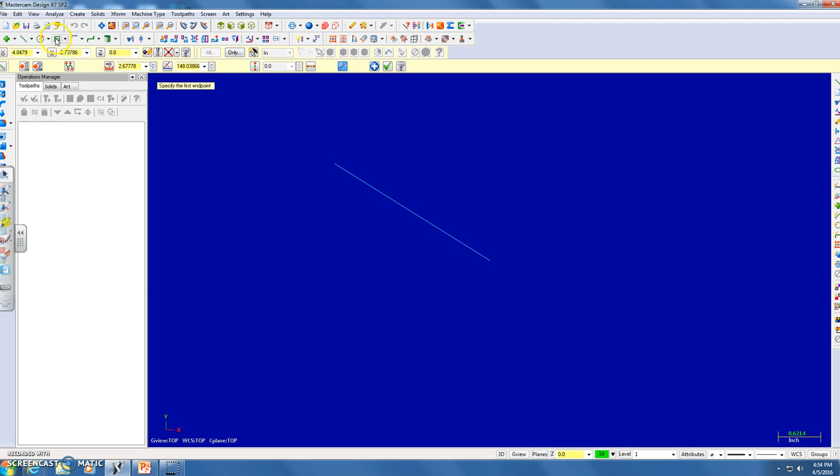So I can create a line. Remember we talked about origin programming, so I want to start by going up to my X, my Y, and clicking 0, 0. Then I always click up off to the left. That way right now I know where my 0, 0 is, I know where my origin is, so I can go ahead and make myself a rectangle at the origin.

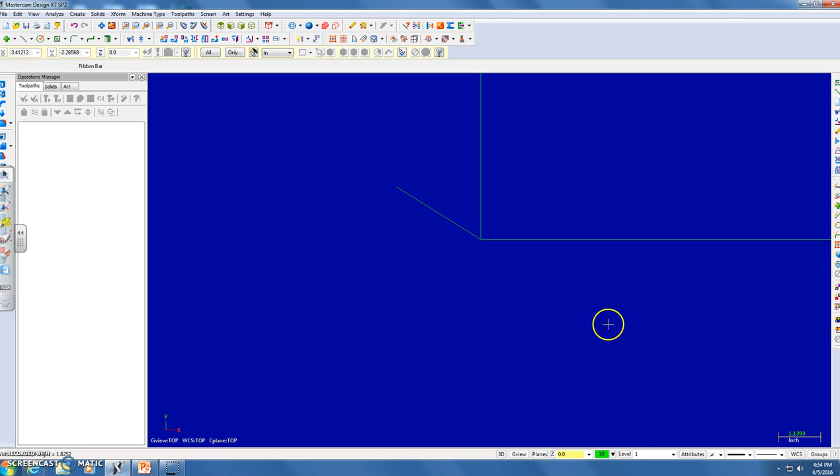Now with our CNC we always work off to the upper right hand quadrant, so I'm going to drag it up to the right from the origin. You can see once again 0, 0 shows up in these two boxes when I hold at the corner. I want it to be approximately 20 by 6 for my sign. Click the check mark, and I now have a rectangle.

So I'm going to add some text in there and go up to create letters. We'll say Mr. Pesavento as my text, and it's already on Engravers MT for me. I'm going to put that on there, and it's also on top of the arc. If I want normal, I'll just click horizontal. I'm going to go top of the arc, and put it a little bit steeper.

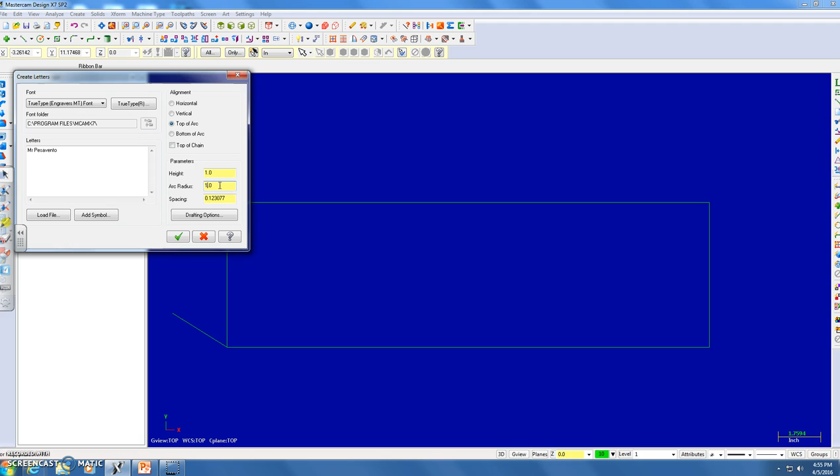Maybe we'll do an 11-inch arc. So click the check, click there, but remember, since I have it on an 11-inch arc, it put it 11 inches high.

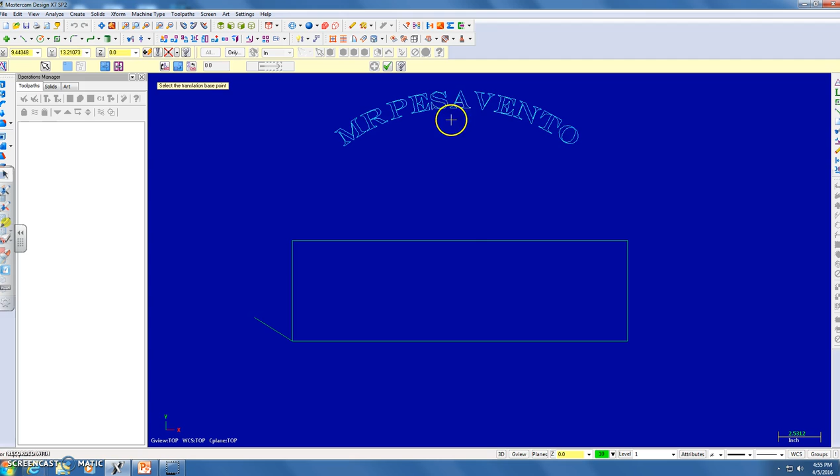Select my name here, Xform drag, and I'm going to shift her on down in there. Sometimes when you do these longer Xforms or bigger objects, it tends to get a little bit laggy. So click where I want it. Remember, I'll always click the check mark, and that's right where I want my sign to be.

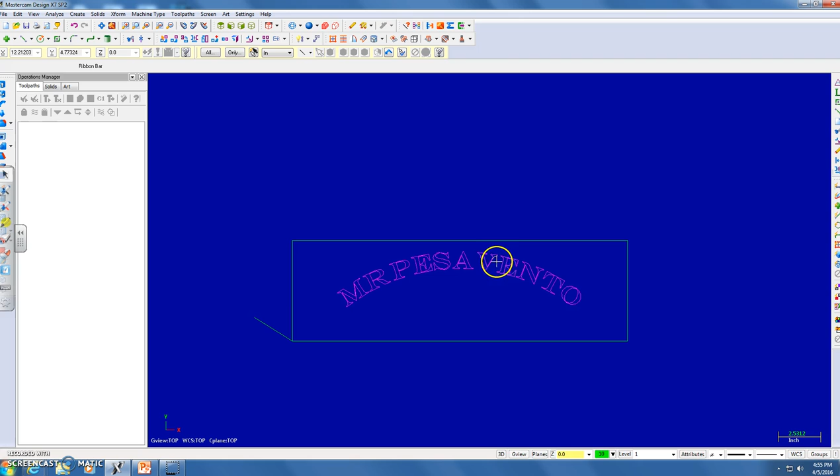So that's a good format there. It's a good font. I'm happy with that. That's good enough. So let's add some art in there.

So I go to art. Remember, if I was already in here, normally you have to click start art, and I'm going to browse the classic design library, and let's see what we can come up with. Go to the art library.

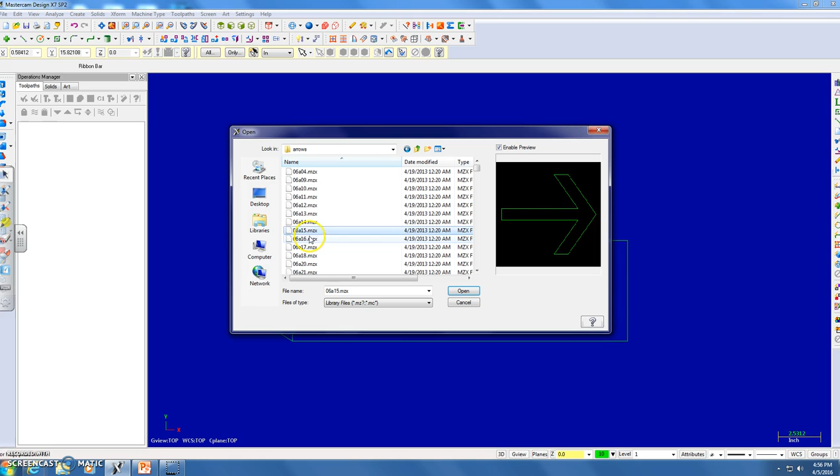Arrows. Oops, that's not what I wanted to do. Hang on there, seemed to have logged out. So go back to browsing the classic library, go back to the art library, and let's find something a little bit interesting.

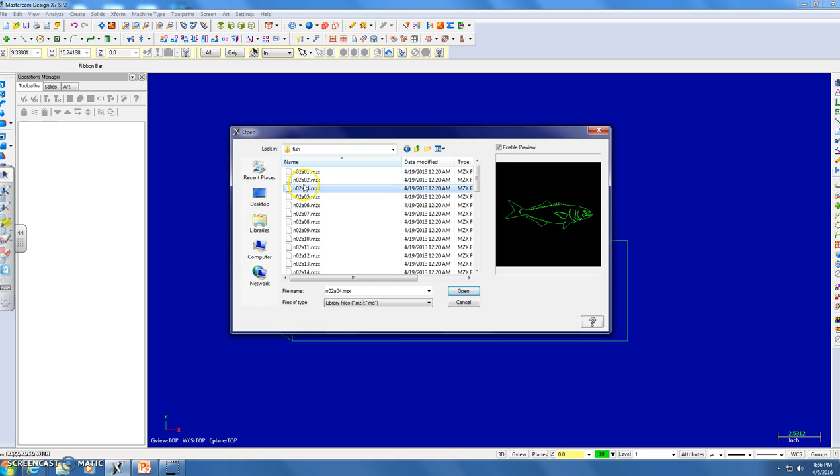Fish. Let's see what's good in the fish one. So maybe I want to put a big old catfish on mine. I'll open up the catfish.

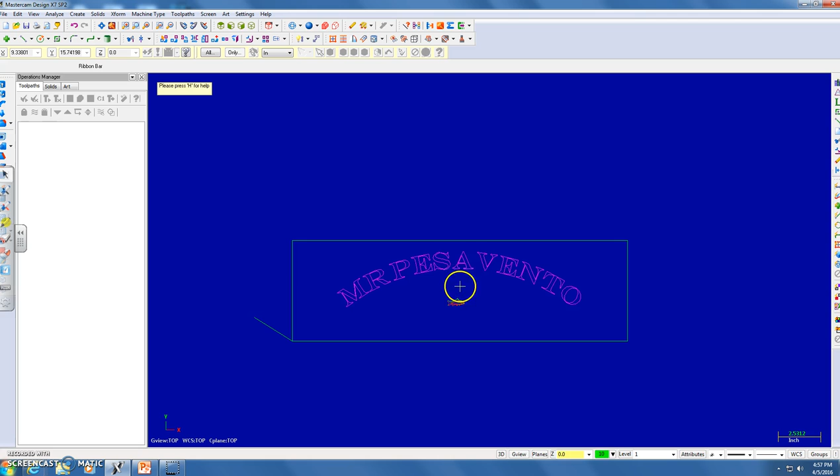I'll say, okay, I want my fish right about here. I don't want another one, so I'm going to click escape. And we can see here that I need to make this fish a lot bigger.

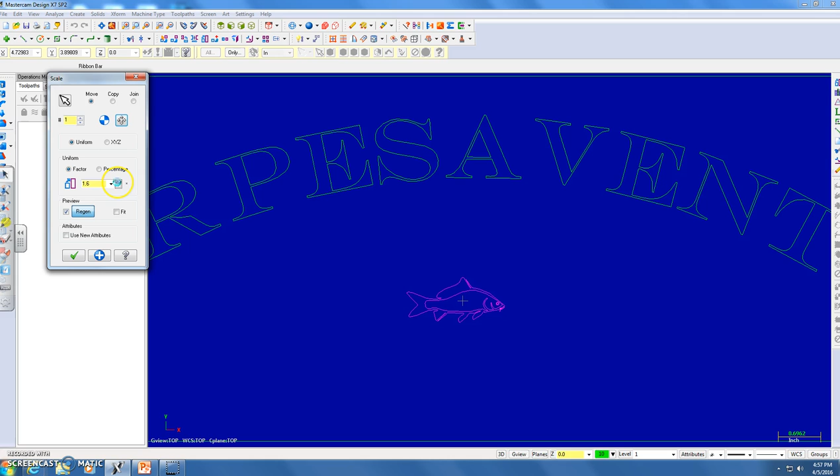So we will Xform, scale it. Remember to click the translation base point in the center. I'm going to make my fish a heck of a lot bigger by just clicking and holding here. And that seems good enough for now. For the sake of this sign, we're just going to call that good.

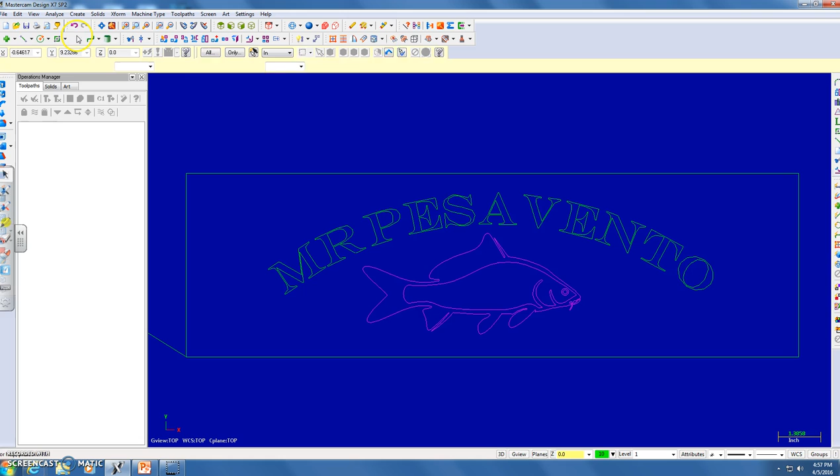So maybe I want to put a little round on my sign. I'm going to go ahead and throw a fillet on there. And what the heck, we'll throw a 1 inch as it comes up. Click around there. Add a little flair to our sign. And there we go, that's a basic sign.

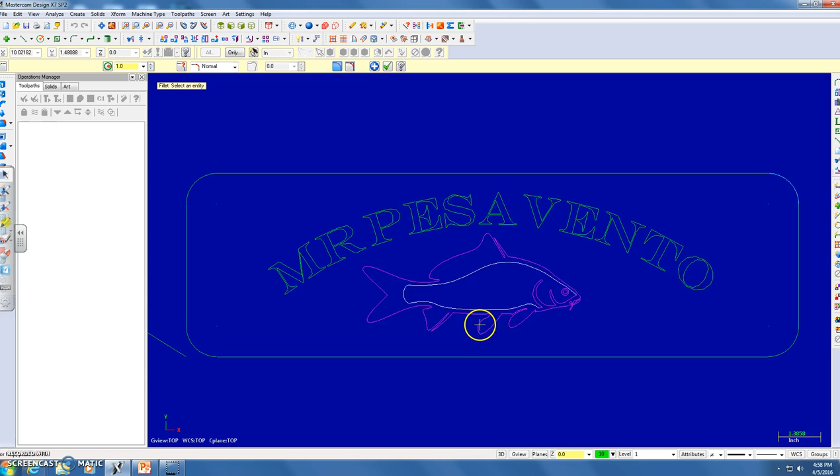I'm going to use two different toolpaths here. I'm going to use engraving, and I'm going to use a contour to cut this out. This guy's going to be a little finicky though. I'm going to have to use a really small bit to cut out my catfish here.

So anyways, first thing I have to do is go up and add the machine. So I need to go to the machine, router, and hit general, and it'll get me the generic Techno router. That's what I want to see up there.

I can then go to my toolpaths, and I'm going to engrave my name first. So I'm going to toolpath, engraving. Click that, and I'm going to go through and click, manually make my chain for everything I want engraved, just to make my life a little easier.

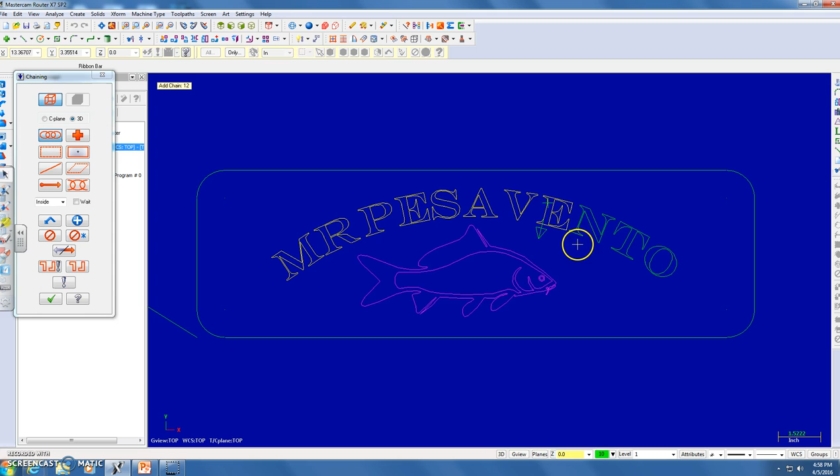I could use the window command, but with my fish being so close there and my letters on a curve, it's going to be just as easy for me to go through and manually select it. Click the check mark once I have everything selected.

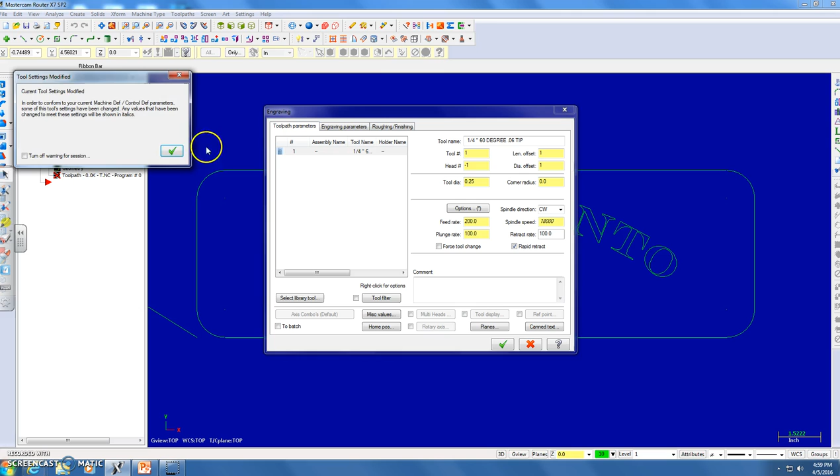For the library tool, I go to select library tool. I want to use the 1/4 inch 60-degree bit, or number 9. You see it'll come up over here, 1/4 inch 60-degree. From there, I want to set my engraving parameters. They should all be absolute.

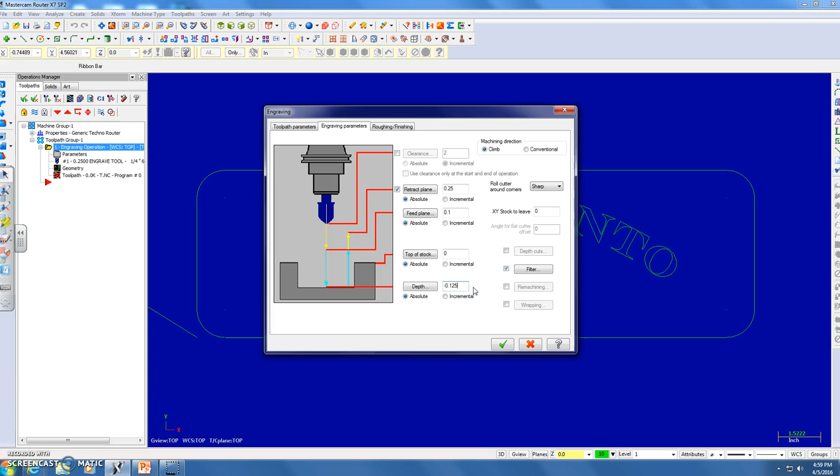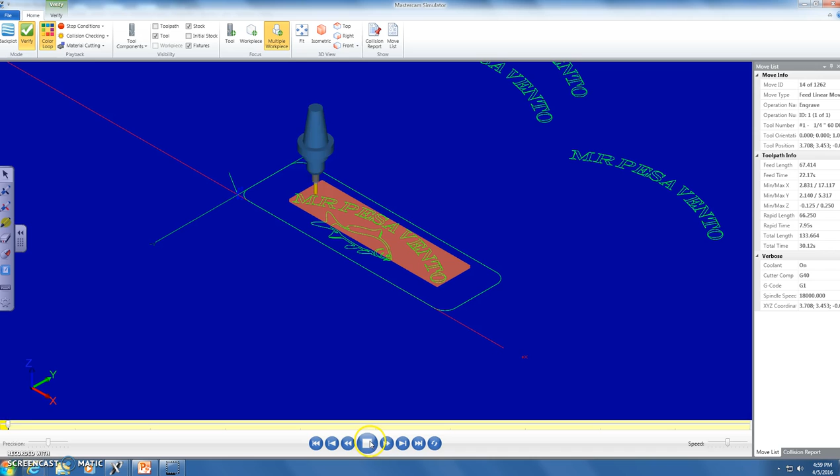To double check it here, I can go over to the verify selected operations. Click this screen, and it takes me to this option where I can hit the isometric view, and I can go through here.

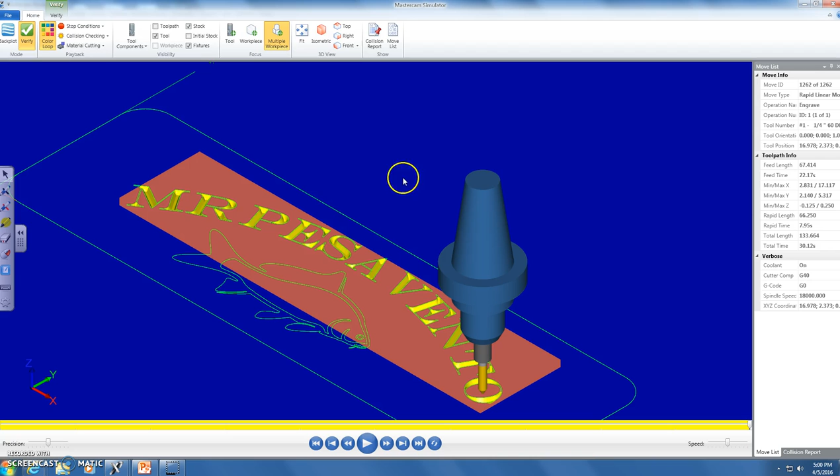But you can tell up here I seem to have clicked Mr. Pesavento a few times when I was moving it down, so remind me later to go back and delete all this. But I'm happy with that engraving. Everything came out fine. That engraver's font is meant for engraving, so it makes my life a heck of a lot easier.

Now I have my engraving toolpath done. You can see everything's over here. I want to go up and cut a contour, so I'm going to manually select my whole fish again.

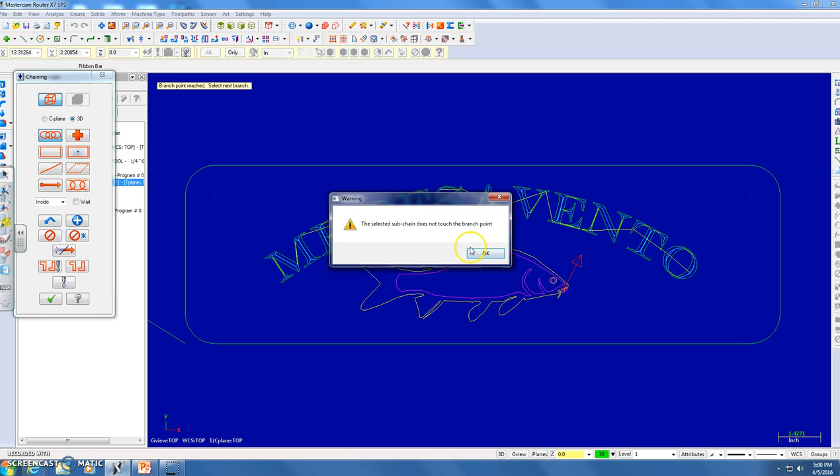You can see that sometimes with the art here, it does not necessarily like what you're trying to select. So let's go toolpaths, contour, and see if I can manually select most of this guy.

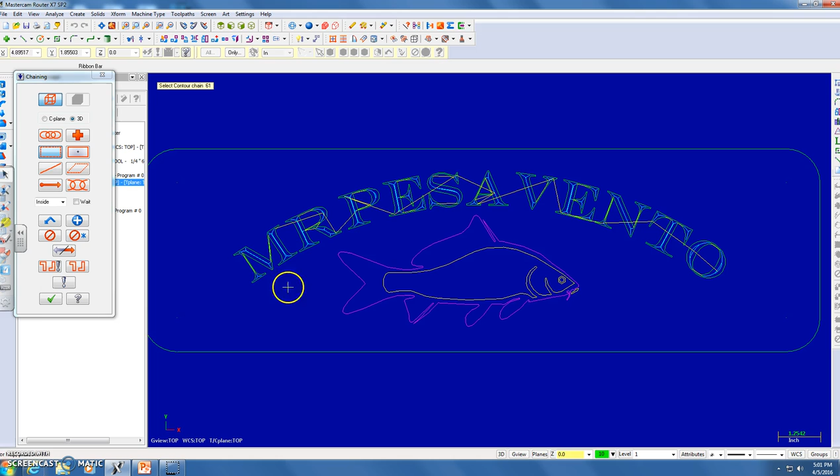Check mark, and we'll go ahead for tool. This time I want to use the select library tool. I'm going to use a 16th inch bit because he's awfully fine.

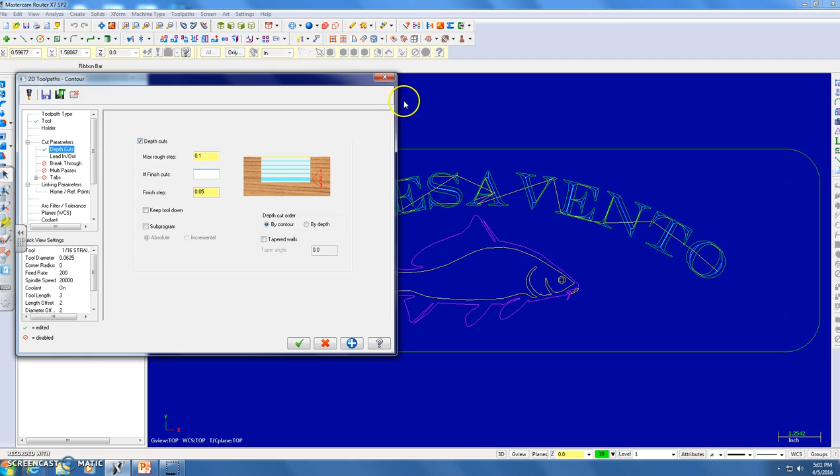Depth cuts, I want to turn my depth cuts on. Remember, they should be 0.1, and my finished cut step should be 0.05. I'll say one finished cut for this. I do not want lead in, lead out on. In my linking parameters, I want them all absolute.

And I'll do the same thing. I'll go negative 1/8, or 0.125 of an inch. And that will cut that aspect of the fish.

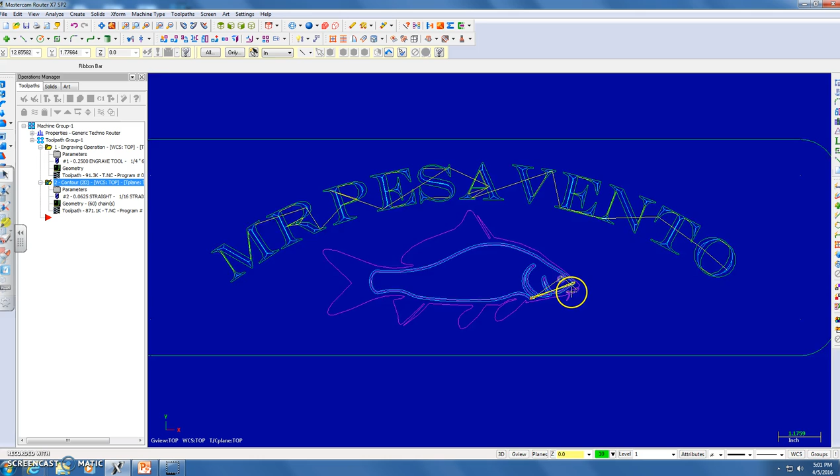But since it didn't like that in the beginning, I'm going to have to cut this side again. So I'll go to toolpaths, contour again, select the outside. And we might just have to forget this guy - that's going to be a little particular.

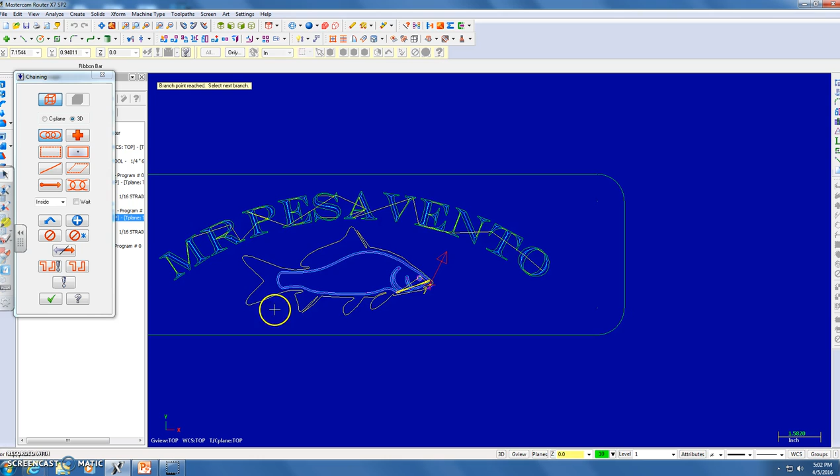Or I can go back and do another contour. I'll have to do the same thing again on this one. Sometimes these photos can get a little interesting.

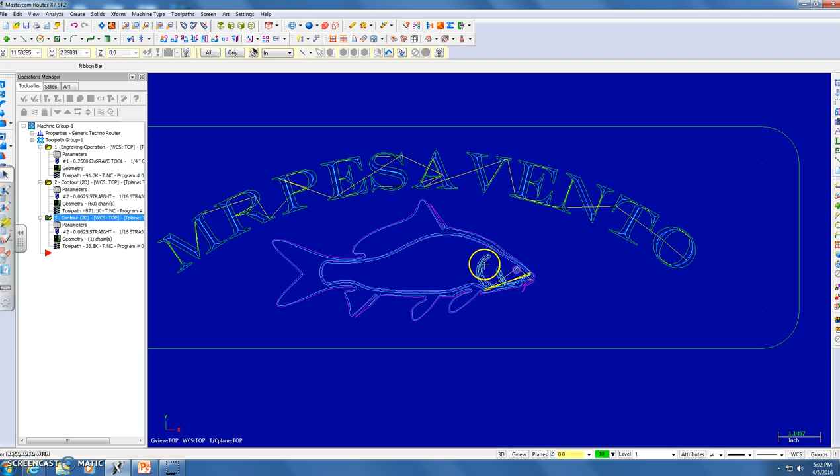16th inch. And it automatically will set the depth and everything for me, since I already did it once. So you can see there, everything is good.

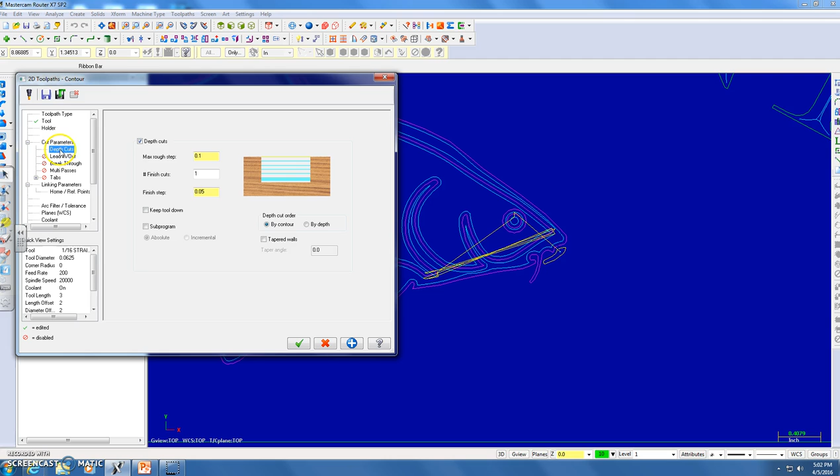I'm going to try to get this guy a contour, we'll see if I can make it happen. There we go, check it, select the tool, 16th. You can see, once again as I just said, everything stayed the same, except we're going to make this one negative 1/8, and we'll be good to go.

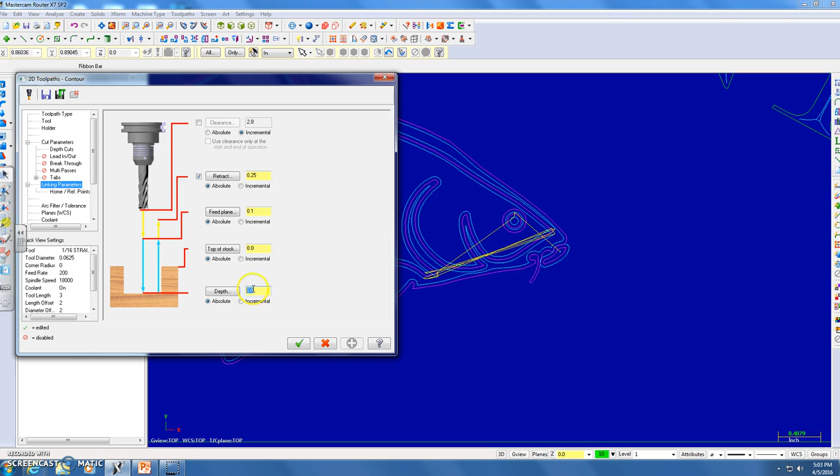I do want to just double check that last one to make sure I did it right. Yep, I did forget to make it negative 1/8. So you can always go back and double check by just clicking on your parameters.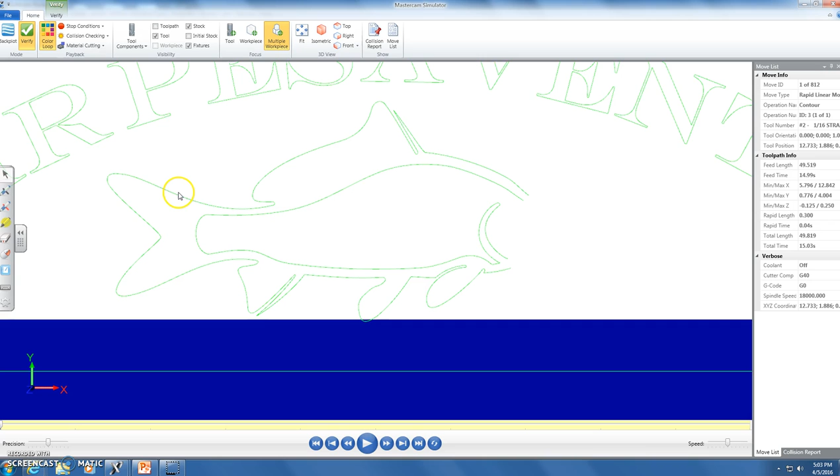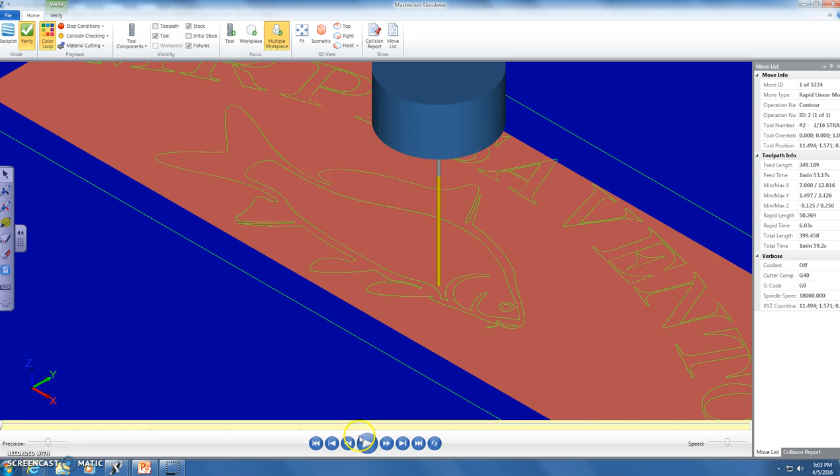And now, as you can see, I have my whole fish set up. I can go in and check my paths again in the Verify Tools option. So that one works. The bad thing is since I did it in 3 different cuts, I'm now going to have to check it in 3 different contours, which really, that's just part of drawing in Mastercam. Sometimes it doesn't always work the identical way you plan on it.

So you can see there, that cut's good, everything's looking good so far. And lastly, we'll check our last little contour. And it cut everything out just the way I wanted it to. And that is basically it.

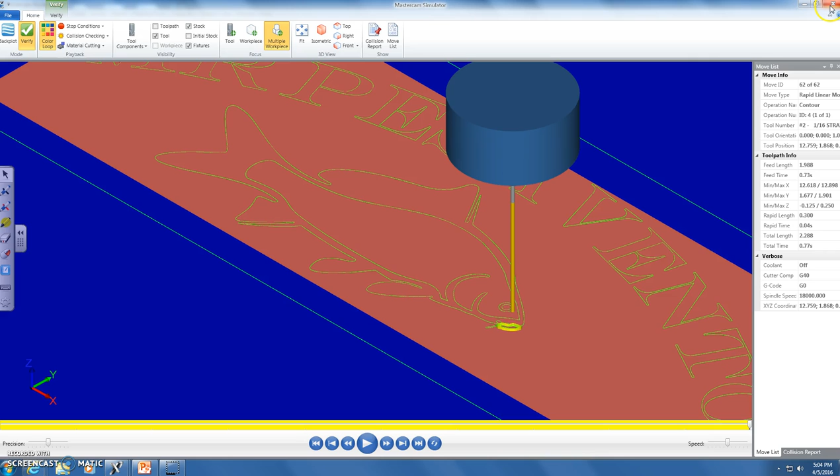And what we're going to do now is take this and convert it to a G-code, an NC file, and I can save it as final project example .nc, and this will be the final project that we actually send over to the router. I'll talk more about the router once it comes that time - I'll have another video that shows you about the router.

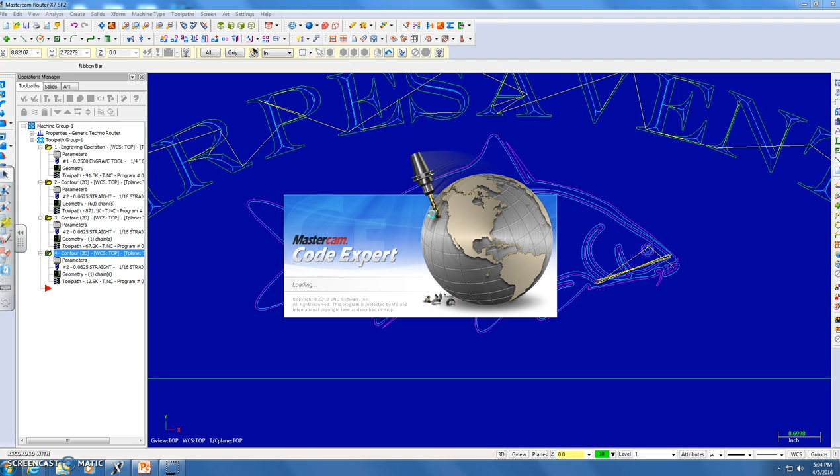So we'll wait a second here, it may take a minute. And this is the program that our router reads. You can see it didn't take me very long to do this. I did it kind of unconventionally, having to do multiple contours, but that's how I had to get the fish to work. But you can see that's 7,267 lines that our router is going to read to cut this program.

And that's it, that's a very simple sign that I just made, no major use of Xforms. I just want to give you a quick example of how to create a sign, and I want you to see it all in real time about how you can make a sign. So once you become familiar with this program, it's very easy to make things very quickly. And I know this is your first time, but it will come easier eventually. So let's get started, and I want to see what kind of signs you can make.